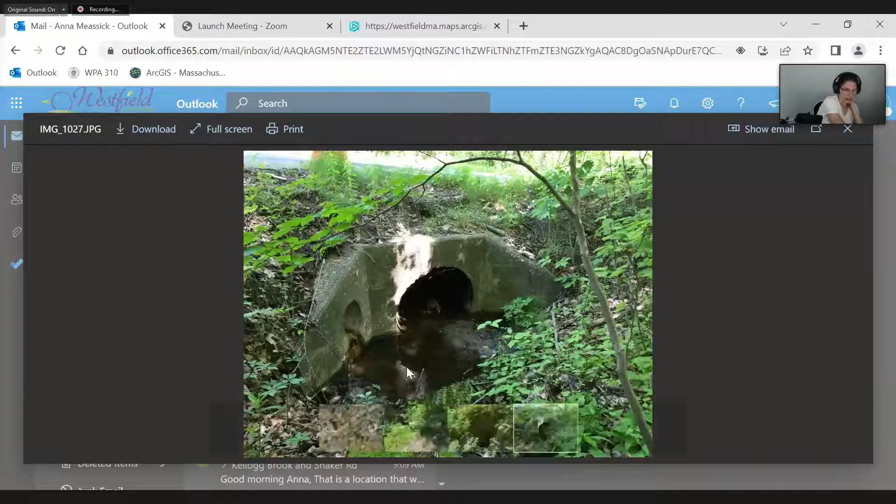And then this is the upstream side. So what's going on is there's pooling happening here because it's not level yet—the culvert isn't level with the water flow.

And you can see the construction cone on the top left there, the nice cone that covers the big hole. But essentially the pipe is corroding, and you can actually see it right here falling apart.

Are you going to armor this after you get it in, or put in some stone, Casey? Yeah, that would be the plan. I would think we'd want to stabilize any compromised surfaces, but we could try and revegetate if that's preferred.

I know that Eric Lancome had mentioned the use of natural stone to help with the water flow in and out of the culvert versus riprap. We could make that part of the project.

Can I ask why the road is failing, and are you fixing that issue? The road is failing because the pipe is rotted out, so it's taking in material from above. It's sucking down, so it's collapsing in.

What's that outfall at the smaller opening? That's part of the drain network west of the location. Is that involved with this project also? No, we weren't planning on doing anything with that.

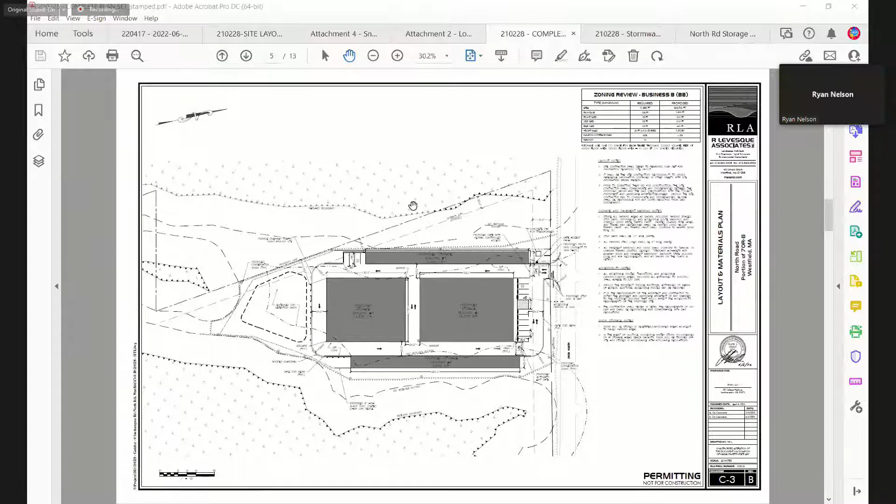One of the items that was brought up was the request for conservation signage along the limit of work. So on C3 of our plan set, on the layout sheet, we're showing conservation monuments along the limit of work. I believe there's a total of 11 of them. And to reiterate, all work is located outside the 50-foot wetland buffer. These circles with the S for sign are the proposed sign locations.

The other item that was brought up was a snow storage plan. I had forwarded those to Anna, and those had been provided to the planning board last week as well. Here's an example of a snow storage plan for commercial property. I can review those if you'd like, if the commission hasn't reviewed them yet. Otherwise, I can continue.

So Ryan, basically what this says is you're going to take the snow somewhere else? If it accumulates on site and there's not enough room within the confines, I guess the second part of that is we've added a wooden guardrail along the back side of the drive aisle so that no snow will be pushed into the detention basin area. So if snow, depending on the amount, can't be fit in these grassed areas off to the side, then in that case, yes, snow would be trucked off site.

You've got a better feel for this site than I do, certainly. How big a snowfall will you be able to handle? Like 2 inches before you have to bulldoze it or remove it off-site? I'm not sure of the amount.

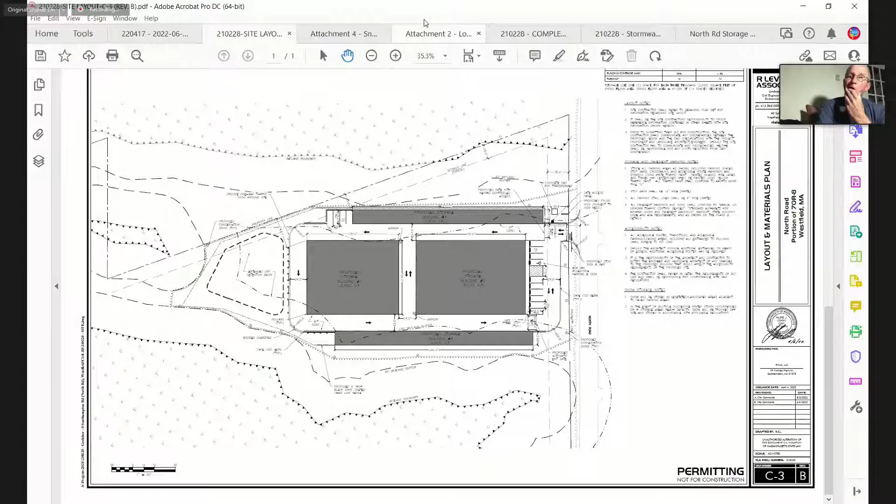Ryan, can we go back to that list, the snow removal text? Thank you. What is a portable snow melting machine? Number 9.

So that's technology that's been around for 20 to 30 years, and it's a unit that melts the snow and it goes down the storm drain. So you load the material into the machine, and it's agitated with water, and the water runs about 38 degrees, and it melts the snow, turns it into water from snow or ice. Commonly used in inner cities, urban areas. We're the only contractor within about a 100-mile radius that has that technology currently.

All right, thank you. Other questions from the commission? I guess there was a concern about dumping, Ryan. Are there signs related to the absence of or the problem of dumping there?

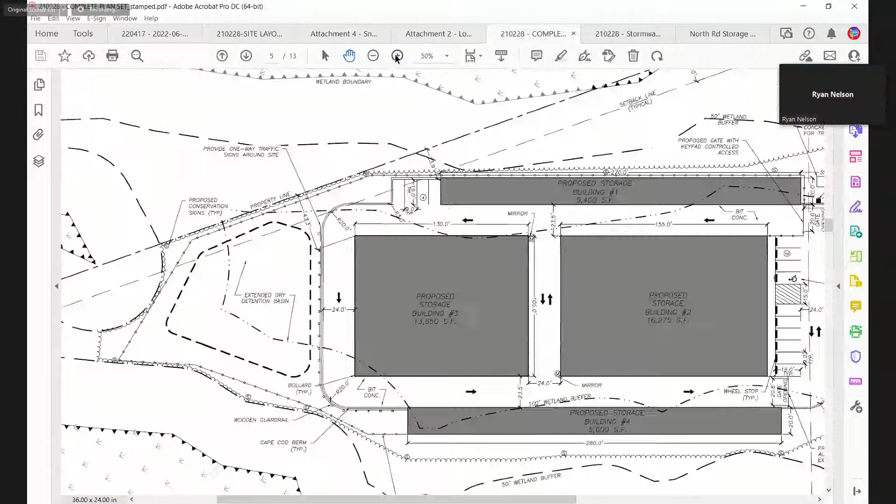In any specific area, or just people throwing stuff over the fence or into the detention area?

So this is the proposed fencing, a 6-foot chain link coming off the back of the building. Due to the grades at the edge of the parking lot dropping off, I don't foresee anyone backing up a truck to dump stuff over the fence. The guardrail along the detention area would inhibit a lot of that too, but for areas up here we're happy to add signs. We can put that language on the conservation signs, though I think it's already on our standard detail. Okay, if you could put it on the conservation signs, it'd be helpful.

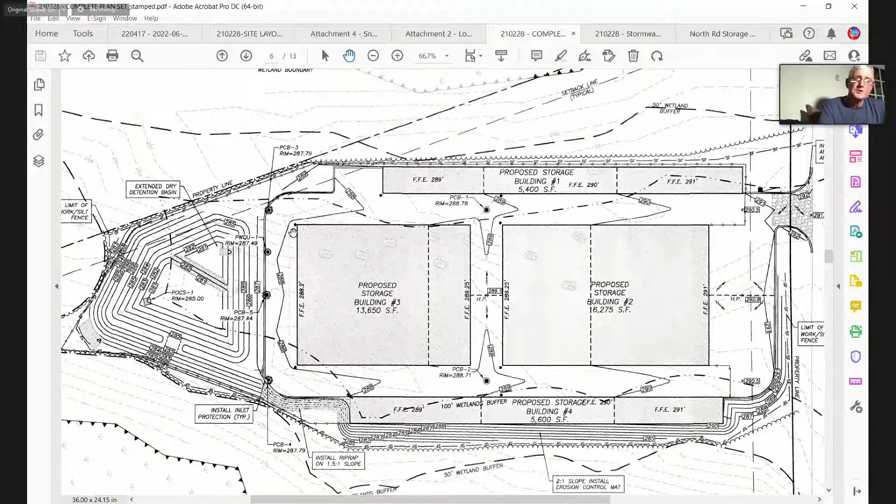Ryan, where does the drainage go, where does it end up? Everything drains to the interior of these parking lots and drive aisles. There are catch basins at low points, and those route to the extended dry detention basin.

And is there sumps with them? Yes, and there's a water quality treatment unit. And you have a maintenance plan? Yes, that's part of our stormwater drainage report, a long-term operation and maintenance plan with intervals of what needs to be checked, maintained, and cleaned out.

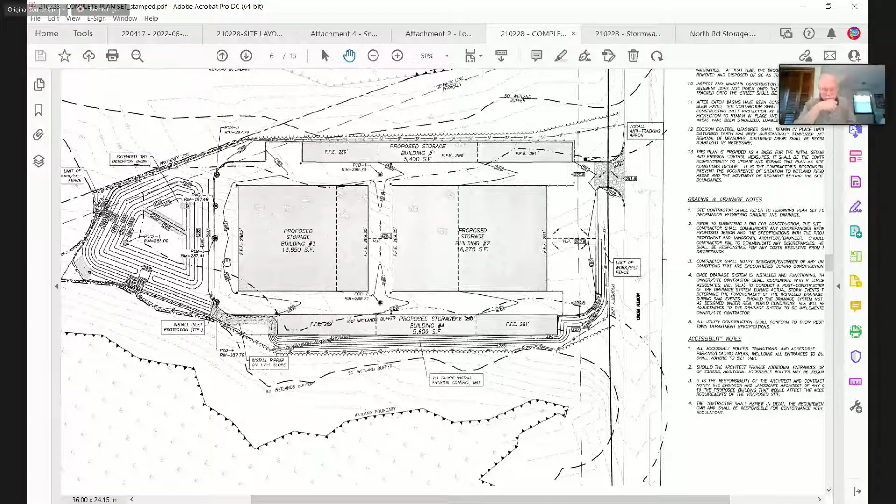Okay, thank you. What are they, by the way? The intervals? Sure, let me pull that up, give me one moment.

Well, Ryan's digging for that. Was that approved by engineering? The stormwater plan? Yes, we had a discussion with Mark Crissati on May 3rd, and there were no outstanding stormwater comments from engineering. Thank you, thank you.

And is there any specific language in the leases to prevent storage of harmful chemicals? Yes, we had submitted an example lease agreement. Let me just answer Jim's question first about operation and maintenance.

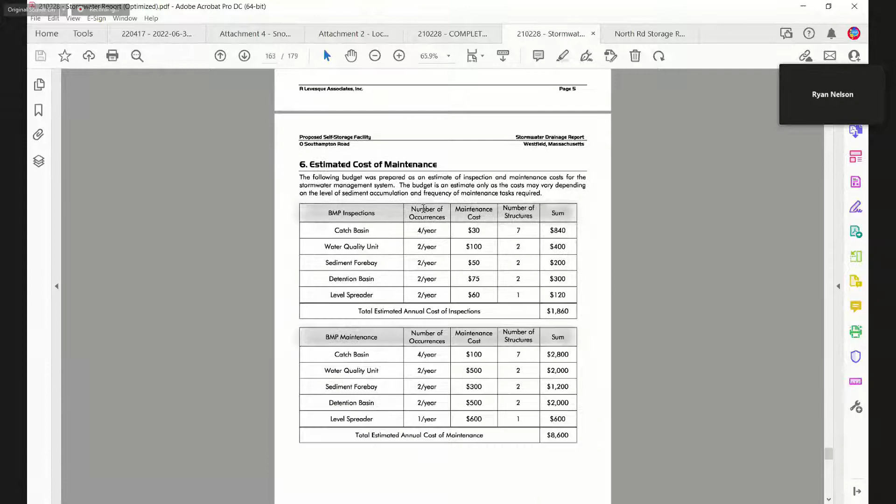So this is our typical long-term operation and maintenance agreement plan, specifically related to the stormwater system. For example, the pavement areas are to be inspected 4 times a year, swept in March or April, and again in late November or December for leaves, debris, and sand. For the deep sump catch basins, it gives the intervals for inspection and cleaning, and covers stormwater piping, roof leaders, the water quality unit, the sediment forebay, the dry basin, level spreader, and flared ends. It also gives instructions for winter and snow conditions, and an estimated cost for maintaining all those items.

Okay, thank you. And then as for the lease agreement, this right here is in reference to hazardous or storage of materials, specifically condition number 2: Tenant shall not place or keep in the premises explosive, flammable liquids, contraband, solvents, pesticides, herbicides, waste, road salts, insecticides, dissolved metals, fertilizers, oxidizers, corrosives, fungicides, arsenic, dry cleaning chemicals, pool products including chlorine, or other goods prohibited by law, and agrees to abide by any rules promulgated by management or government governing the use of these premises. Okay, thank you.

All right, any other questions or concerns of the commission? Mr. Chairman? Yes, Karen. Go ahead, Karen. Oh sorry, Jim. No, go ahead.

Regarding the melting of materials, that could constitute thermal pollution if they're heating stormwater and it outfalls into the wetland. So I'm just throwing that out there, you may want to prohibit that activity.

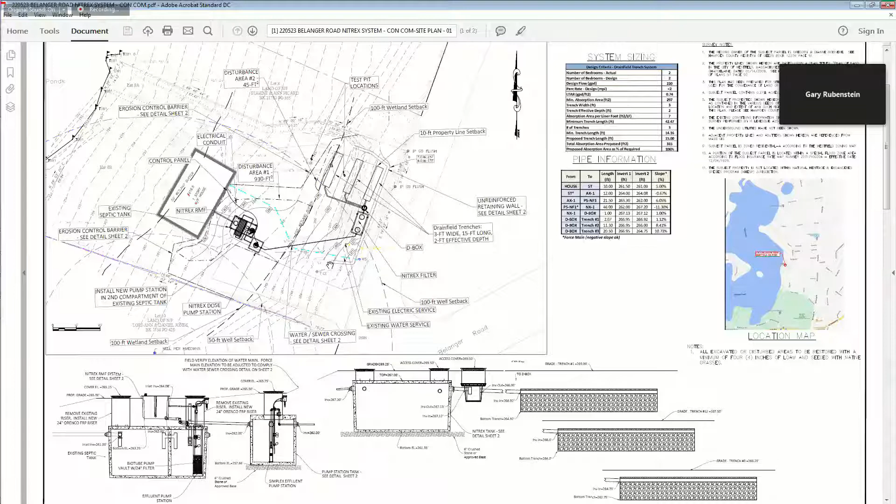So am I hearing you say that this is more cost effective than a tight tank? Oh, absolutely. The tight tank would be very expensive over time, and I'm not sure tight tanks are even... they're strongly advised against where there are other approvable alternatives. Tight tank is a last resort. This is an approvable alternative.

Got it. All right, thank you. Anna, you want a site visit? Yes. Okay.

All right, so we'll arrange a site visit before the next meeting. But before that, any other questions from the commission? Seems like a very interesting project here.

All right, I have one more question. 216.5 Belanger Road. Is that the Belanger Road that's partially in Southampton?

And just to orient myself. I think so, it's on that corner. I see a map, but it's too small to really orient. Okay. Yeah, okay, all right, that's okay. That's all right. Thank you. Thank you.

Any questions from the audience concerning this project? Again, it will be continued after due to site visit.

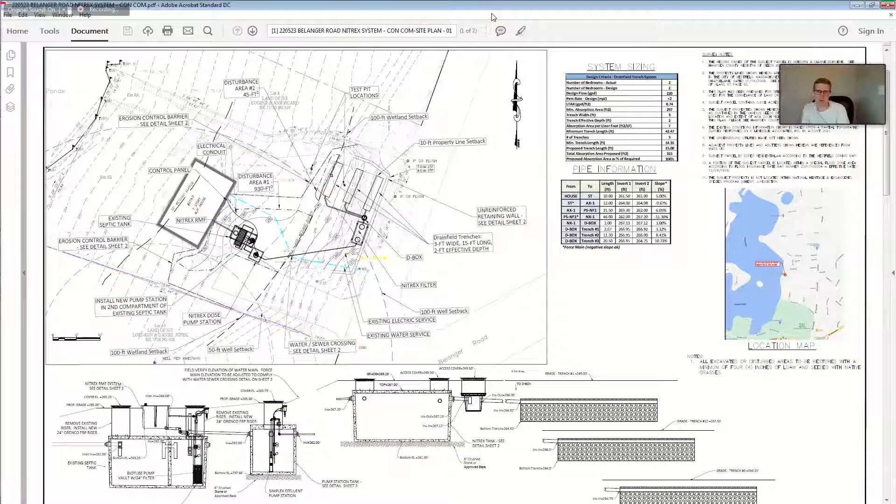All right, seeing none, I'll entertain a motion to continue to June 28th. So moved. Do you have a second? I'll second whoever made the motion. Okay, all in favor? Tom, yes. Jim, yes. Lauren, yes. Bob, yes. Alex, yes. And I'll vote yes.

Thank you. All right, item C, 558 and 590 Granville Road.

Mr. Patterson. In accordance with the provisions of Massachusetts General Laws, Chapter 131, Section 40, a public hearing will be held at 6:30 PM on Tuesday, June 14, 2022 by virtual meeting regarding a notice of intent submitted by John Patterson for the maintenance of an existing drainage ditch at 558 and 590 Granville Road in Westfield.

Excuse me, Mr. Chairman, can I say something? Can I recuse myself from this? You certainly may. Thank you. Okay.

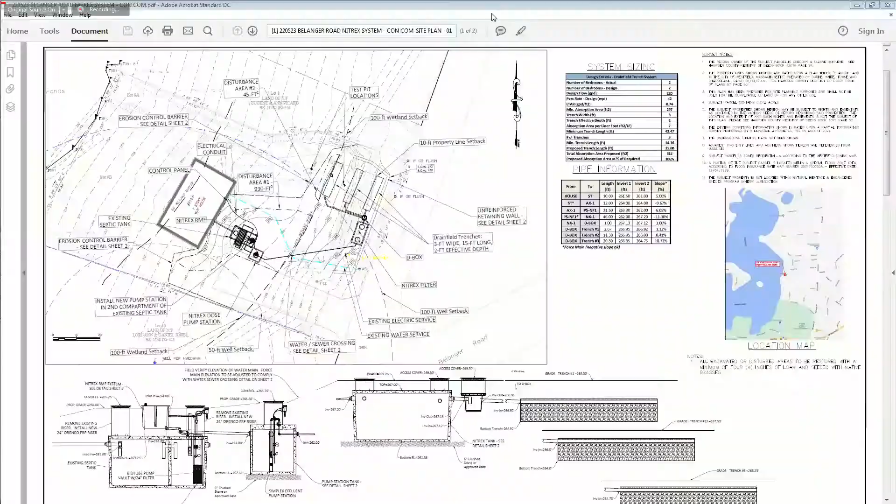Ryan, are you presenting this or is Rob? Yes, hello everyone, Ryan Nelson from R. Levesque Associates, representing the applicant and owner, Mr. John Patterson. As stated, this is located upstream of the culvert that Casey was talking about earlier on Granville Road.

The culvert's located right here, near the intersection of Wood Road. Mr. Patterson owns two parcels: 558, which is this cutout lot around the single family home, and 590, which includes this house and a greater land area around the back. The property slopes from the uphill side of Wood Road down to Granville Road.

Historically, this property has been cleared and used as farm fields, not currently or recently, but historic aerials going back to 1957 show this area as farm fields, as well as an existing drainage ditch that was created, we've been told, in the early 1900s, and the aerial imagery certainly reflects that. There's an existing drainage ditch that starts in the hillside and drains through that culvert Casey was talking about underneath Granville Road.

In the past, several times over the decades, Mr. Patterson's family has routinely cleaned out the ditch, which grows in with vegetation and sediment. In the past, I believe he was issued an RDA, a negative determination, in 2004 to do that work, and he's looking to do that once again.

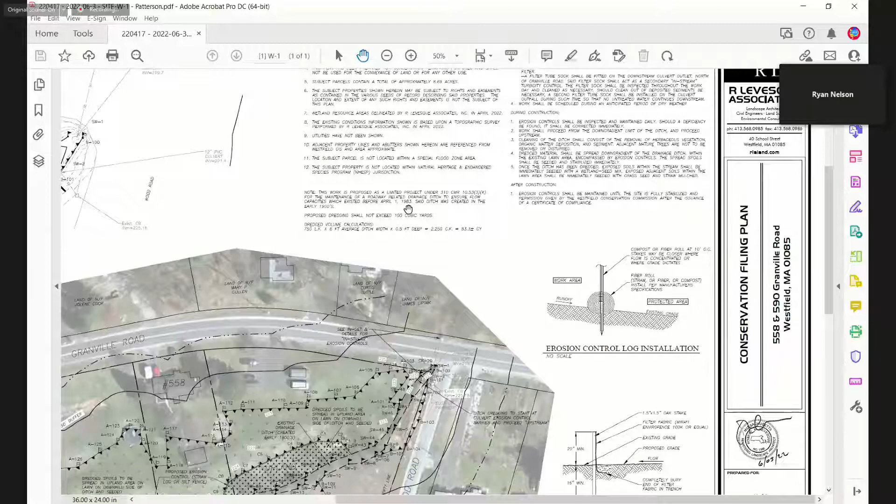So this work is proposed as a limited project under 310 CMR 10.53, Section 3K, for the maintenance of a roadway-related drainage ditch to ensure flow capacities which existed before April 1st, 1983. In this case, the ditch was created prior to that date, and Mr. Patterson is looking to dredge the bottom substrate of that ditch to restore the flow capacities that existed prior to that date.

This would eliminate or greatly reduce the amount of flooding that's been occurring on his property, and I would think it would benefit the town as well, giving more positive drainage through that culvert and not impounding near the culvert head wall. In terms of sequence, similarly we would propose to do this during a dry stretch of weather, preferably in July or August.

A sediment sock would be placed on the downstream side of the culvert, on the opposite side of Granville Road, to catch any silt or debris that would enter the culvert inadvertently. And then upstream, ahead of the culvert head wall, if you look at this inset blow up...

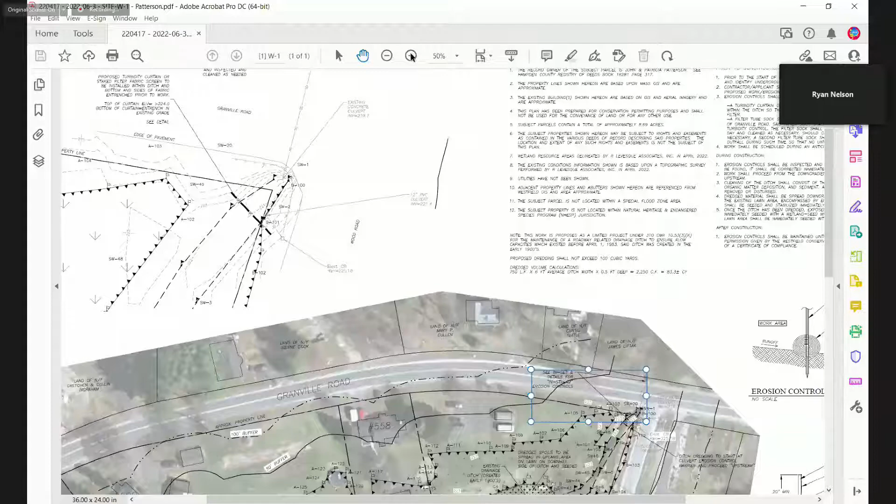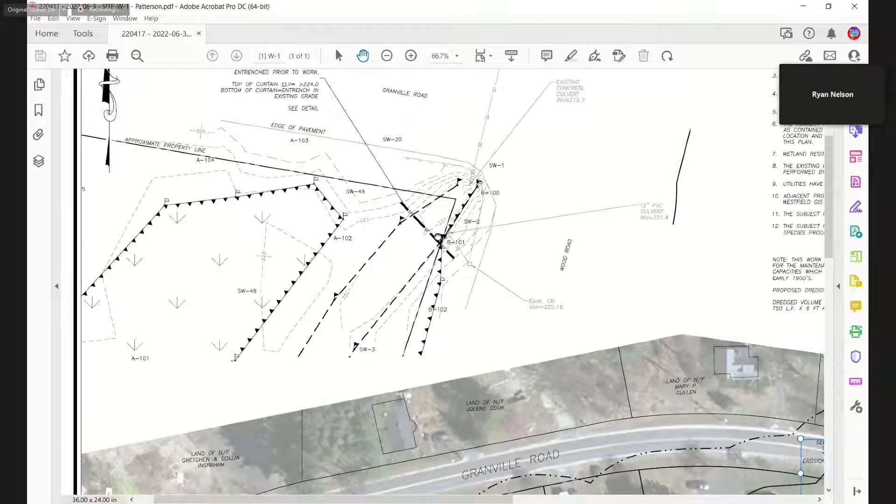A filter fabric screen would be entrenched within the depression. The land slopes from the road down to this ditch, and we'd be entrenching a silt fence or filter fabric across that to act as a sediment barrier, catching any suspended sediment during the work that continues downstream. The work would proceed from the downstream end and continue upstream, with the thought being that as you work your way upstream, the drainage gets better and better, and water is freed from these impounded pool areas, increasing the flow across our property.

And then there are two upland areas adjacent to this ditch that we have delineated. You can see it on the outside of the C wetland series, and also here. What Mr. Patterson would like to do, with a small mini excavator on rubber tracks, is drive parallel along the stream, and then with a grading bucket, just skim out the bottom six inches in the vegetation, stockpiling and spreading out the spoils within these upland locations.

Due to the high organic content of the substrate of that ditch, and the seed bank, we feel that if he was just to rake that sediment out over the existing lawn area, it would regrow, and then he would just continue to maintain it as lawn.

A silt fence would be placed on the down gradient perimeter of those stockpile areas, and we'd also be putting silt fence check dams along the stream once the work is complete. Any exposed soil within the stream would be seeded with a wetland seed mix.

All right, thank you. Ryan, what stream are you referring to? This drainage ditch right here. So you're calling the drainage ditch a stream? Or did I hear you wrong? I mistakenly said stream, it's a drainage ditch. That's how we've referenced all of it, but yes.

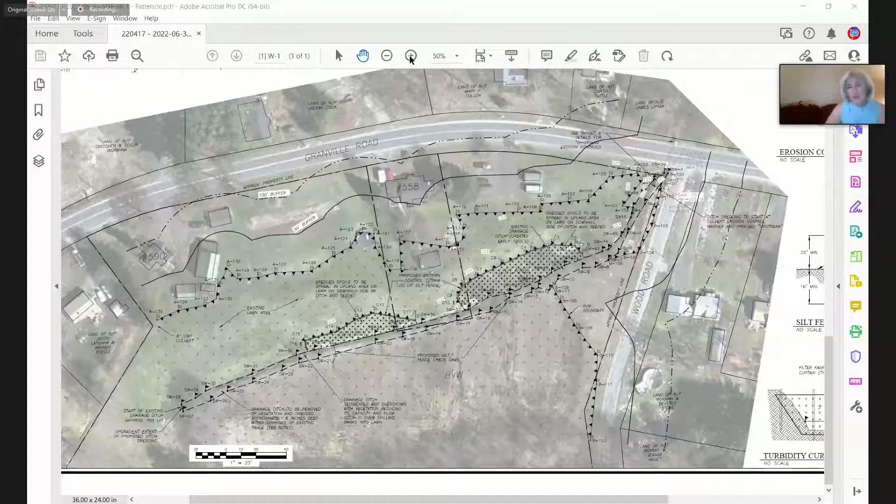However, the culvert exits onto 515 Granville Road. It doesn't go into one of the other drainage pipes in Granville Road. It exits directly onto 515 Granville Road. And in fact, many years ago, the city came by to clear it because it was blocked.

I will say it was blocked when they did it. And at the time the city did it, they left a huge mound of dirt, debris, rocks, whatever came out of there. They left it right on the side of the ditch. And now it's a pile of dirt that has trees growing out of it.

But the erosion continues. And because it goes into the culvert, everything coming down Wood Road goes into the culvert. Everything coming off of Mr. Patterson's property goes into the culvert, out the culvert, and down the full length of the 515 Granville Road property, which is probably about 360 feet to the river. And it used to be a ditch that we could easily step across. Can't do that anymore.

Mr. Chairman, may I add something? Yes. Hi, Angela. Thanks for your concern, and I do understand your point of view. I haven't seen the erosion and the drainage ditch on your property, but perhaps this would be a good time to have a conversation with Casey from the city, and maybe there's some outfall protection measures that can be done on your property, whether it's stone armoring or a plunge pool. I'm not sure at what elevation your culvert is discharging, but maybe there's some things that can be done on your property to help alleviate that situation.

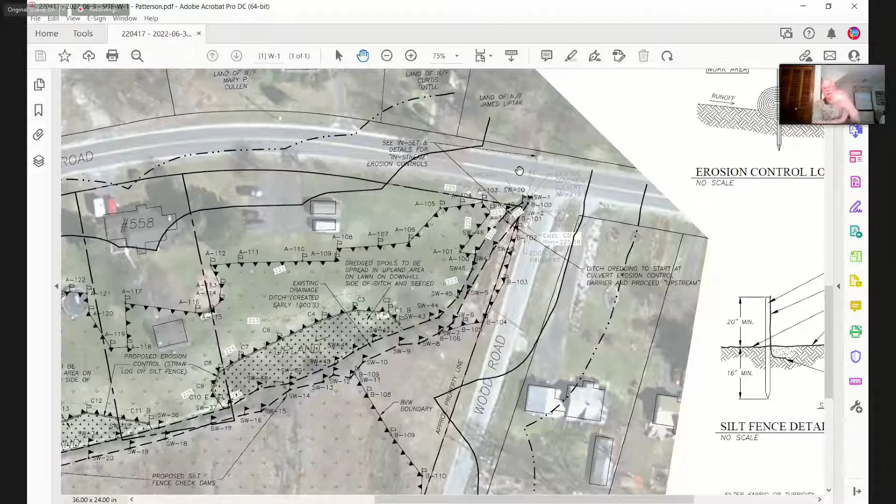I guess velocity, flow rate, what change in the geometry of the channel will do to velocity, would armoring help it, would putting riprap in that channel help slow it down, give Mr. Patterson the drainage he wants, but although you're not going to reduce the amount of water going through the culvert, you are probably going to reduce the velocity. I think there's a lot of other options, we just don't know. So I don't know if two weeks will cause irreparable harm to the applicant.

Casey may have other input on this and other ideas on how to handle it that would accommodate Mr. Patterson better. So I guess I don't know what we need. My question would be the one I asked Angela.

Have someone document for us, will this impact other landowners? To me, if we were to give approval to someone to cut down a 100-foot tree, knowing that it's going to fall on the neighbor's garage, that doesn't make any sense. Jim, I'm with you totally. I'm ready to vote that we continue this.

Mr. Chairman, if I may add, I would just like to reiterate that we're not adding impervious surface, we're not changing the watershed, we're not changing topography. We are restoring flow capacities that existed prior to the threshold date stated in the regulations. Ryan, you're moving a bunch of water from one spot to another. You're drying out one spot and pushing it somewhere else.

Karen, my question would be, show me where that water is going and that it won't negatively impact other property owners. But that's where the water always went, it's just until recently it's been impeded. We're restoring its prior condition. Because it's being filled in, right? Over time it's slowly not becoming a stream, but becoming a marshy wetland. So you're trying to establish or reestablish the channel.

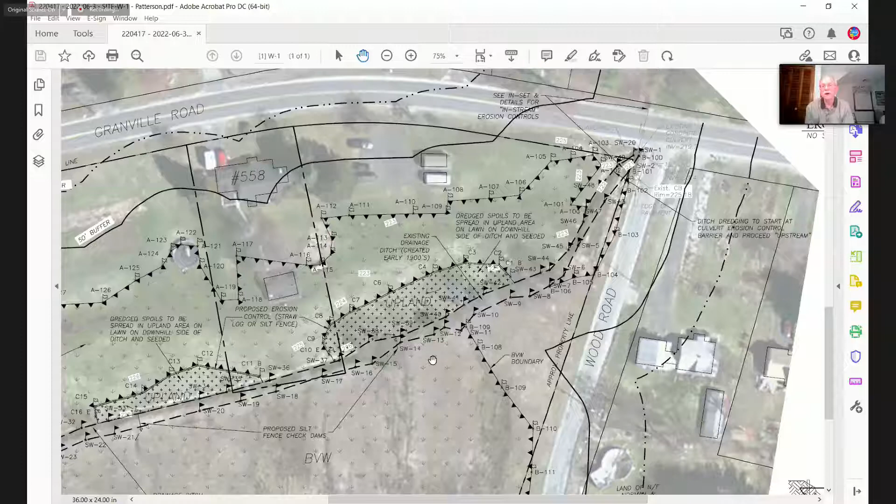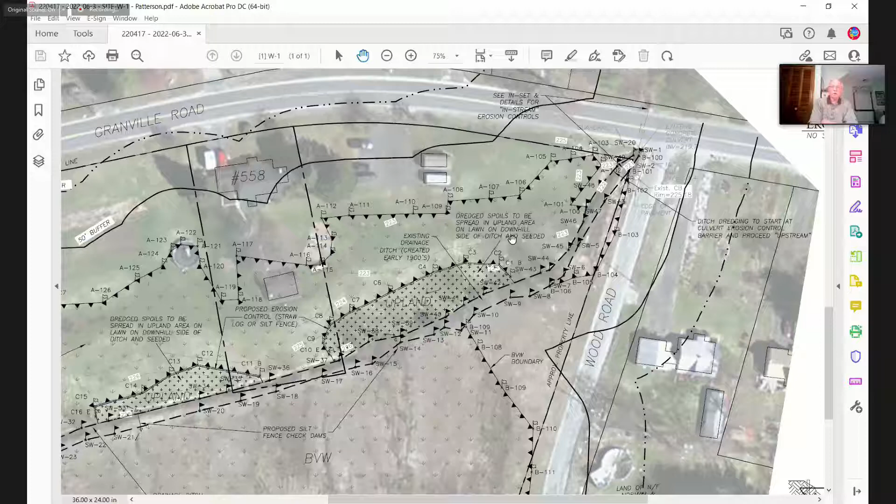6 feet, okay. So you've got side walls or some kind of slope or bank, right? It varies—in some spots on the downhill side it's a foot, some spots it's only a few inches where it overspills into the yard. Okay, so you're going to maintain the 6 foot wide floor? Yes, correct. So once again, the contribution of water flowing down to it will remain constant, no different than it is now, unless things change above it.

I'm just trying to get an understanding of this a little bit more. So is my understanding correct on that? Yes, you're correct. Ryan, there is absolutely no intention to do any work on that other ditch that runs across the back of the lawn? No, that was just a low point within the lawn that was added to help drain it, and that also drains into the ditch. So there's absolutely no intent to modify that? That's correct. There's no plans to change that.

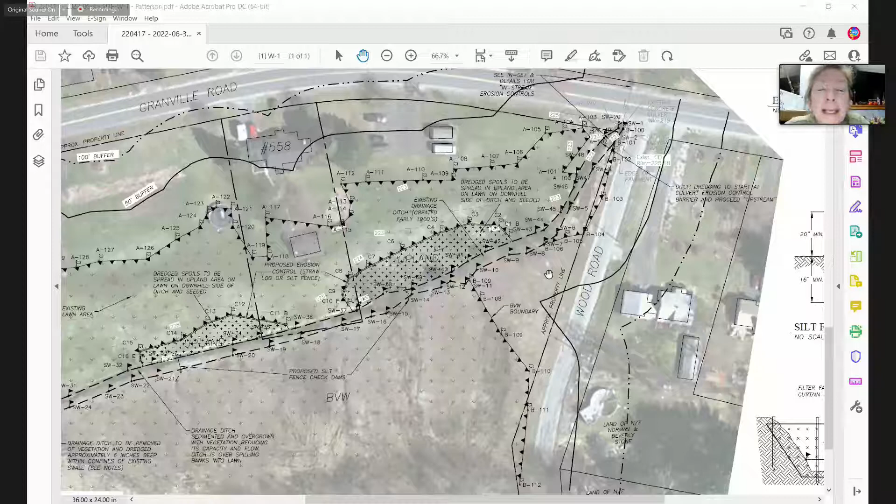For removal of harmful vegetation? Sorry, can I interrupt? Tom, I think it would be really beneficial for you to take a look at the stream. I hear what you're saying, but you have to see it in what they're trying to do. If you saw it, I think you would understand.

There's a motion to continue. I'll make the motion. All in favor to continue? Wait, I need clarification, what is the motion for, so I can write it down. Who made the motion? I'll make the motion based on the fact that we have not heard from DEP. Who seconded it? I seconded it.

All in favor? Lauren, yes. Jim, yes. Bob? I'm recused. Sorry, it's been a while. Alex, yes. Who's left? Jim, I already said yes. I'll vote yes. David, yes. All right, let's move on. Thank you, everyone, see you next time.

All right, item 5, enforcement, 33 Castle Hill Road, continued from 5/10.

It looks great, I recommend closing it. We're out looking at the site, it's getting vegetated very nicely, and there's a recommendation to close out the enforcement order.

Do you have a motion to that effect? So moved. Do you have a second? I'll second. Any further discussion? Seeing none, all in favor? Lauren, yes. Bob, yes. Jim's gone. Alex, yes. Tom, yes. I'll vote yes as well.